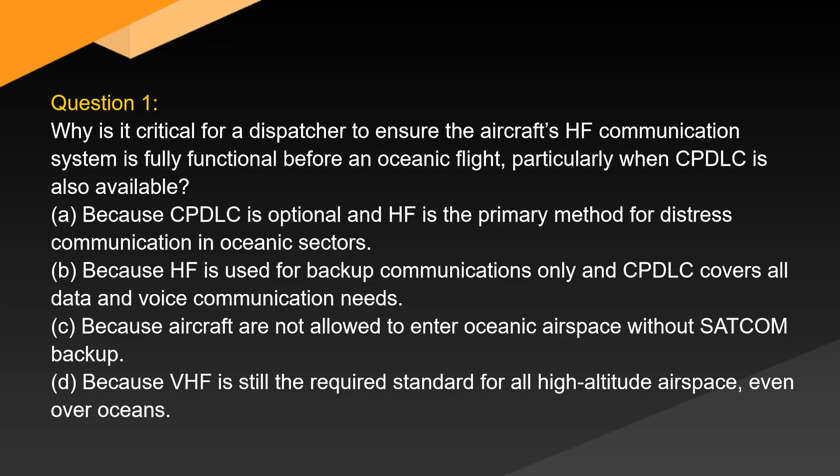A. Because CPDLC is optional and HF is the primary method for distress communication in oceanic sectors. B. Because HF is used for backup communications only and CPDLC covers all data and voice communication needs. C. Because aircraft are not allowed to enter oceanic airspace without SATCOM backup. D. Because VHF is still the required standard for all high-altitude airspace, even over oceans.

Correct answer: Because CPDLC is optional and HF is the primary method for distress communication in oceanic sectors.

Explanation. In oceanic airspace where there is no radar coverage and limited VHF range, high-frequency HF communication is the primary backup system for voice communication, particularly for emergencies. Although CPDLC, controller pilot data link communications, allows for digital messaging between pilots and controllers, it is not a substitute for HF when it comes to distress and urgency situations.

ICAO Annex 10 Volume II and FAA AC 90-117 clearly emphasize that aircraft operating beyond VHF coverage must have reliable long-range communication like HF. This ensures the aircraft can report positions, receive clearances, and handle emergencies. SATCOM can supplement but not universally replace HF, as many regions still rely on HF voice.

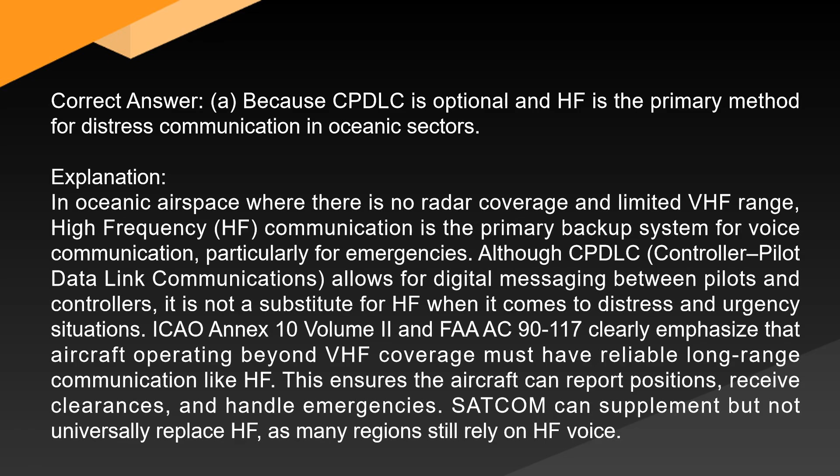Question 2. What is the primary consideration when deciding whether to divert an aircraft due to a pressurization failure during cruise? A. Remaining fuel and the distance to the nearest ETOPS alternate.

B. The aircraft's altitude and ability to descend to a safe breathable level within drift-down constraints. C. Cabin altitude and the passenger's oxygen supply limitations. D. The loss of communication ability due to system failure during the pressurization issue.

Correct answer: C. Cabin altitude and the passenger's oxygen supply limitations.

Explanation. A loss of pressurization leads to an immediate increase in cabin altitude. At altitudes above 10,000 feet, supplemental oxygen becomes necessary, and above 14,000 feet, regulations mandate it be provided.

FAA regulations under FAR Part 121.333 stipulate time of use limitations for oxygen masks, typically 12 to 22 minutes. This time is meant to allow the aircraft to descend to 10,000 feet where oxygen is no longer needed.

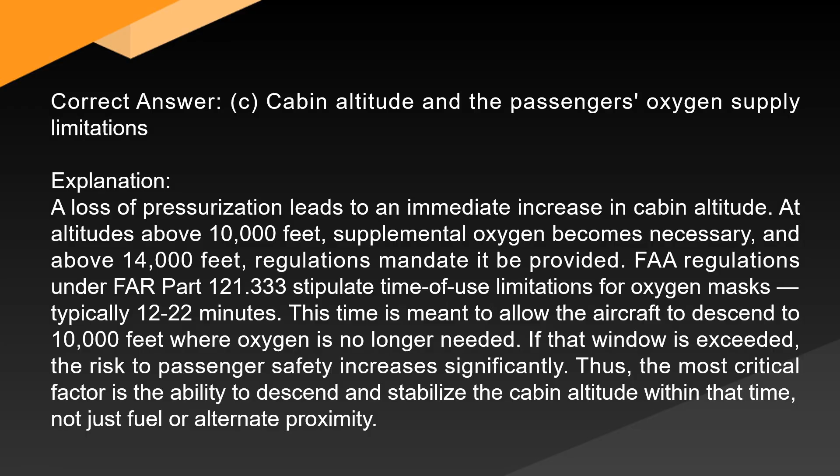If that window is exceeded, the risk to passenger safety increases significantly. Thus, the most critical factor is the ability to descend and stabilize the cabin altitude within that time, not just fuel or alternate proximity.

Question 3. Ms. Garcia is a licensed dispatcher overseeing Flight XR-120, a transatlantic route from New York to Madrid using a twin-engine ETOPS-certified aircraft. Two hours into flight, the aircraft experiences an engine oil pressure drop.

Although the engine is still operating within limits, the captain and Ms. Garcia agree to review diversion options. Weather conditions at the planned ETOPS alternate have deteriorated below landing minimums. Fuel reserves are sufficient for a diversion, but the only viable alternate now is 90 minutes further away.

What should Ms. Garcia do in this situation? A. Continue with the original ETOPS alternate, as fuel was already planned with reserves.

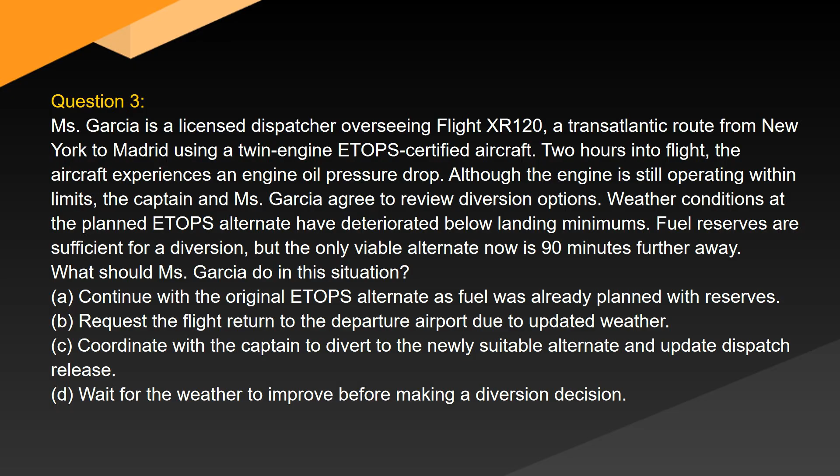B. Request the flight return to the departure airport due to updated weather. C. Coordinate with the captain to divert to the newly suitable alternate and update dispatch release. D. Wait for the weather to improve before making a diversion decision.

Correct answer: C. Coordinate with the captain to divert to the newly suitable alternate and update dispatch release.

Explanation. ETOPS, Extended Range Twin-Engine Operational Performance Standards, operations require that suitable alternate airports be available within the aircraft's certified diversion time, based on engine-out scenarios.

In this scenario, the original alternate is now below minimums, violating the requirement for an adequate alternate. ICAO Annex 6 Part I and FAA AC 120-42B require that the aircraft always remain within diversion range to a suitable alternate. Dispatch must coordinate with the PIC to identify the new suitable alternate and legally update the dispatch release.

Waiting is not compliant with regulations, and returning to the origin may not be efficient or necessary if another alternate is suitable and within ETOPS range.

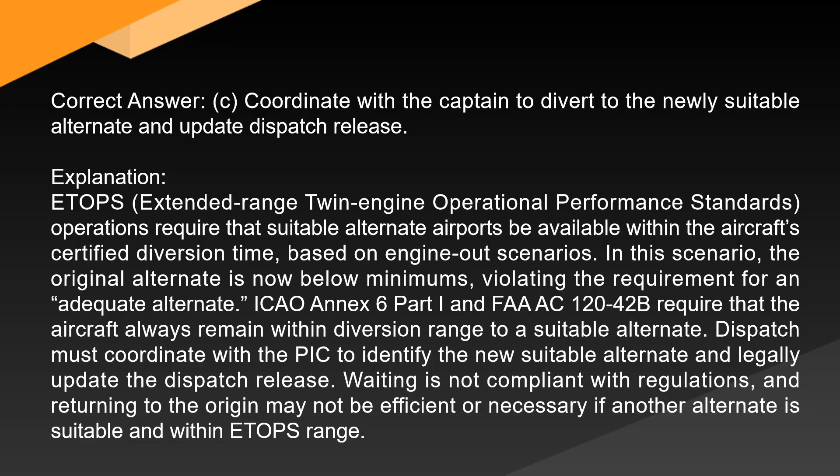Question 4. Which of the following best explains the importance of SELCAL in transoceanic operations? A. It replaces all need for manual HF radio monitoring during flight. B. It allows air traffic control to send voice messages directly to FMS.

C. It alerts the crew of an incoming HF communication, reducing the need for constant monitoring. D. It is used for data link messaging in place of CPDLC.

Correct answer: C. It alerts the crew of an incoming HF communication, reducing the need for constant monitoring.

Explanation. SELCAL, selective calling, is a valuable system that alerts pilots when a ground station wants to initiate communication over HF or VHF.

This reduces crew workload on long flights where HF monitoring is required but extremely fatiguing. SELCAL tones trigger a chime in the cockpit, allowing the crew to turn up the HF radio volume for that message only. ICAO Annex 10 recommends SELCAL usage in oceanic operations.

It doesn't transmit data or replace CPDLC. It's strictly an alerting system. CPDLC handles digital communications, while SELCAL applies to voice HF-VHF.

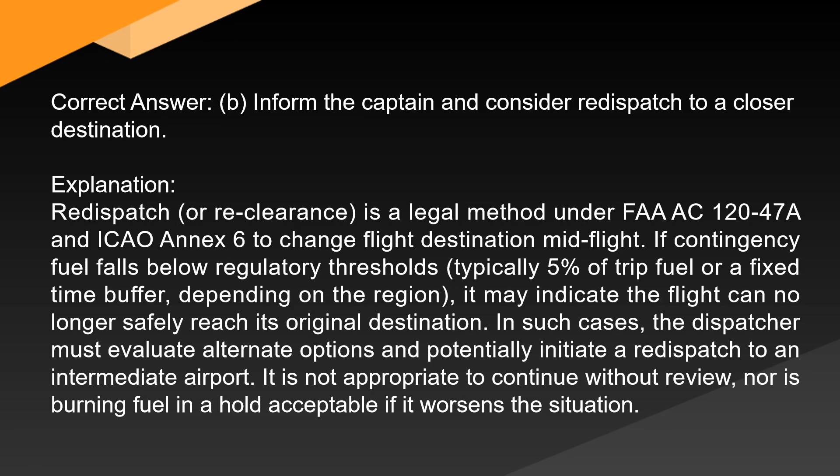In such cases, the dispatcher must evaluate alternate options and potentially initiate a redispatch to an intermediate airport. It is not appropriate to continue without review, nor is burning fuel in a hold acceptable if it worsens the situation. Question 7: Which of the following best represents the difference between CPDLC and ACARS in dispatch communications?

A. ACARS is used only for performance data, while CPDLC handles clearances. B. CPDLC is a proprietary airline communication, while ACARS is regulated by ICAO. C. CPDLC is used for air traffic control communication, ACARS is used for airline operational communication. D. There is no difference; both systems operate on the same protocol and function.

Correct answer: C. CPDLC is used for air traffic control communication, ACARS is used for airline operational communication. Explanation: while both CPDLC and ACARS use digital data links, their functions differ.

ACARS, Aircraft Communications Addressing and Reporting System, is primarily used for operational control, like sending out-of-limit reports, flight plan updates, and performance data between the aircraft and dispatcher.

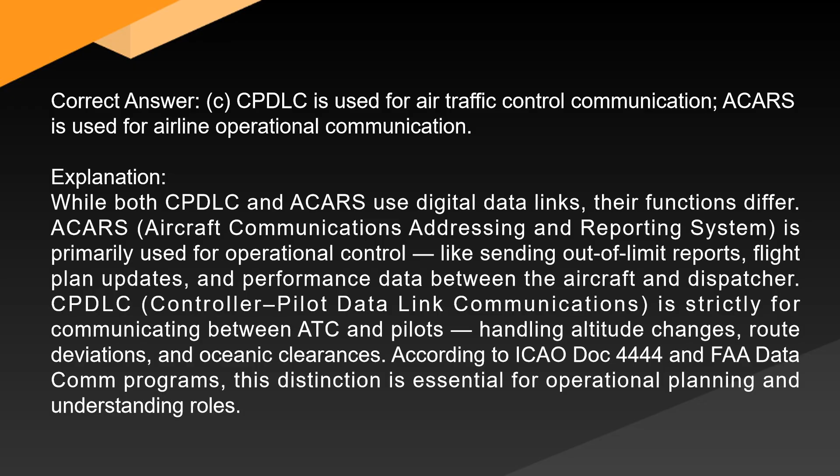CPDLC, Controller Pilot Data Link Communications, is strictly for communicating between ATC and pilots, handling altitude changes, route deviations, and oceanic clearances. According to ICAO Doc 4444 and FAA Data Comm programs, this distinction is essential for operational planning and understanding roles.

Question 8: During fuel dumping operations, what is the most important environmental and operational consideration a dispatcher must verify before advising the flight to proceed?

A. That the aircraft is at cruise altitude to ensure full burn-off of dumped fuel. B. That fuel dumping occurs over populated areas to allow for quicker ATC coordination. C. That fuel dumping occurs above a minimum altitude and away from congested areas or protected zones. D. That fuel dumping happens at low altitude to reduce atmospheric dispersion.

Correct answer: C. That fuel dumping occurs above a minimum altitude and away from congested areas or protected zones. Explanation: fuel dumping is regulated under FAA Order 7110.65 and ICAO environmental guidelines.

Dumping must be done at a safe altitude, usually above 6,000 ft AGL, and away from populated or environmentally sensitive areas to avoid harm to people and ecosystems.

ATC must be informed and involved, and specific dumping zones may be designated. Dispatchers must coordinate closely with ATC and the flight crew to ensure these procedures are followed, especially when time-critical descent or landing is needed.

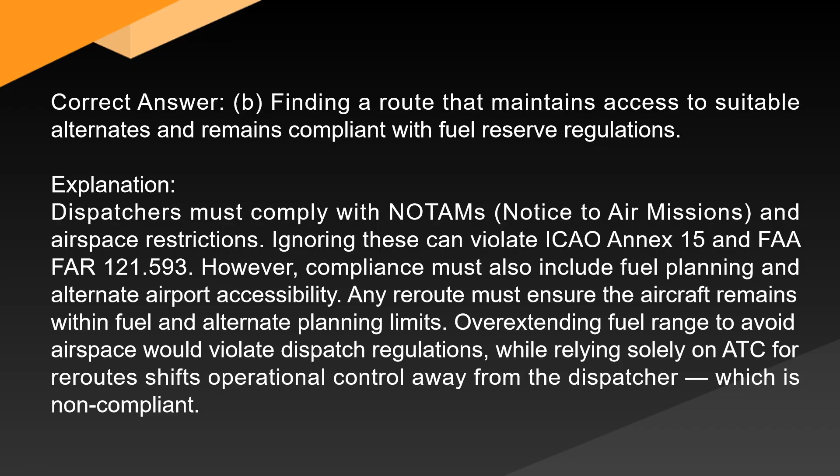Question 10. Which weather product provides real-time turbulence information derived from aircraft sensors and is most useful for en route operational updates? A. METAR. B. AIRMET. C. PIREP. D. SIGWX chart.

Correct answer, C. PIREP. Explanation: Pilot reports, PIREPs, are essential for dispatchers and pilots to assess actual flight conditions. PIREPs include turbulence, icing, and cloud tops, especially valuable when derived from automated sensors onboard aircraft, e.g., AMDAR or ACARS turbulence reports. They reflect current atmospheric conditions, unlike AIRMETs and SIGMETs, which are forecasts. METARs are surface observations. Dispatchers monitor PIREPs closely, especially when rerouting around turbulence zones. ICAO Annex 3 and FAA AC 00-45H emphasize PIREPs' operational importance.

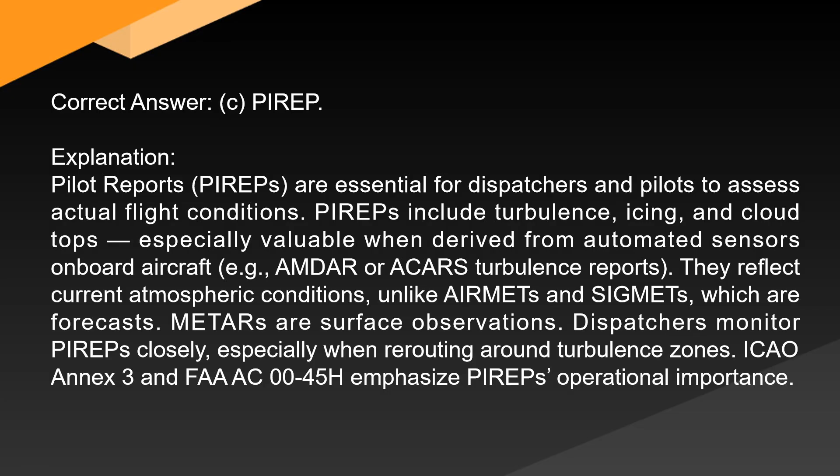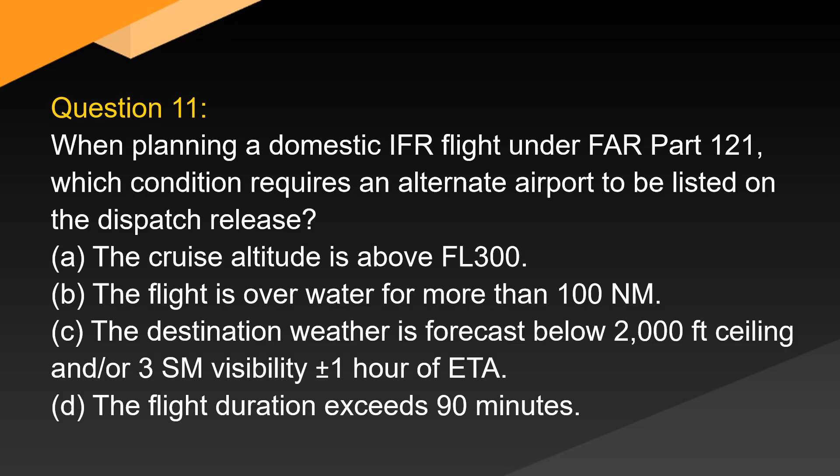Question 11. When planning a domestic IFR flight under FAR Part 121, which condition requires an alternate airport to be listed on the dispatch release? A. The cruise altitude is above FL 300. B. The flight is over water for more than 100 nm. C. The destination weather is forecast below 2000 ft ceiling and/or 3 sm visibility plus or minus 1 hour of ETA. D. The flight duration exceeds 90 minutes.

Correct answer: C. The destination weather is forecast below 2000 ft ceiling and/or 3 sm visibility plus or minus 1 hour of ETA. Explanation: This is the 1-2-3 rule from 14 CFR Section 121.619. An alternate is required if, from 1 hour before to 1 hour after the estimated time of arrival, the forecast weather is below 2,000 feet ceiling or 3 statute miles visibility. This ensures that if conditions deteriorate, a legal and suitable alternate exists. Flight duration, altitude, or distance over water do not independently mandate alternates under domestic IFR rules.

Question 12. A flight is planned from Dallas-Fort Worth, DFW, to Minneapolis, MSP. The TAF for MSP at ETA shows OVC 008, 2 SM BR, but a conditional tempo group shows improvement to BKN 015, 4 SM. Based on FAR Part 121 requirements, should the dispatcher plan for an alternate airport?

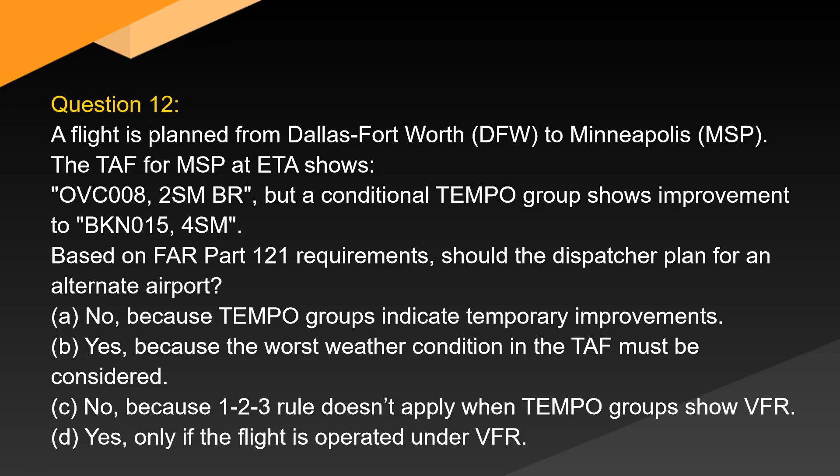A. No, because tempo groups indicate temporary improvements. B. Yes, because the worst weather condition in the TAF must be considered. C. No, because the 1-2-3 rule doesn't apply when tempo groups show VFR. D. Yes, only if the flight is operated under VFR.

Correct answer: B. Yes, because the worst weather condition in the TAF must be considered. Explanation: Per FAA AC 00-45H and FAR 121.619, a dispatcher must consider the worst prevailing condition, including tempo or prob groups, within plus or minus 1 hour of ETA when determining alternate needs, even though conditions may improve temporarily. If they are forecast to fall below the 1-2-3 rule during any part of the window, an alternate is required. The overcast at 800 ft and visibility of 2 sm clearly fail the test.

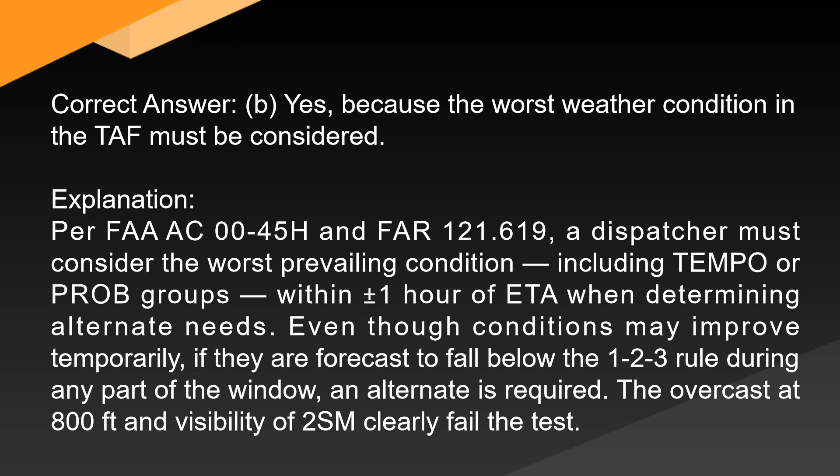Question 13. Which type of navigation aid is mandatory for dispatchers to verify availability for RNAV-dependent routing under Part 121? A. Only ILS equipment. B. GPS and ground-based VOR/DME infrastructure. C. TACAN availability along all airways. D. Non-directional beacons, NDBs only.

Correct answer: B. GPS and ground-based VOR/DME infrastructure. Explanation: When dispatching RNAV flights under Part 121, availability of GPS signals or fallback to ground-based infrastructure, VOR/DME, must be considered. FAA AC 90-100A outlines operational use of RNAV and requires dispatchers to check NOTAMs, RAIM predictions, or navigation system NOTAMs to ensure navigation reliability.

TACANs and NDBs are rarely part of modern RNAV en route navigation and are not primary considerations.

Question 14. When determining takeoff performance for a wet runway, which factor most significantly affects the V1 decision speed? A. The headwind component. B. The aircraft's weight only. C. The runway slope only. D. Accelerate stop distance and runway surface condition.

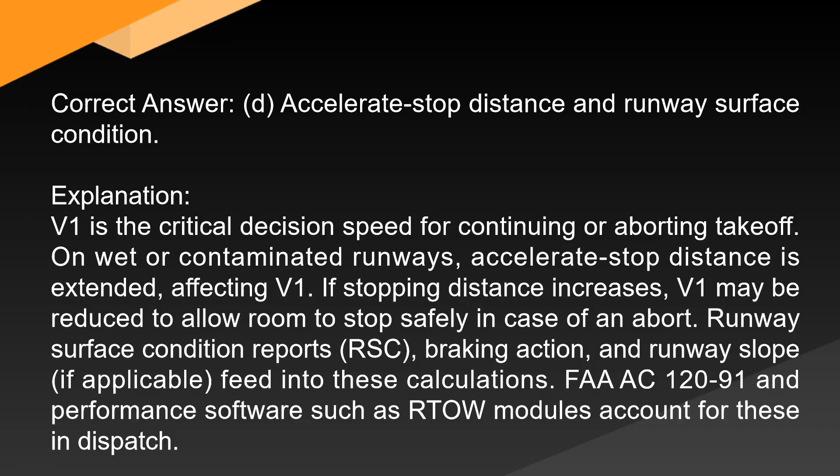Correct answer: D. Accelerate stop distance and runway surface condition. Explanation: V1 is the critical decision speed for continuing or aborting takeoff. On wet or contaminated runways, accelerate stop distance is extended, affecting V1. If stopping distance increases, V1 may be reduced to allow room to stop safely in case of an abort. Runway surface condition reports (RSC), braking action, and runway slope, if applicable, feed into these calculations. FAA AC 120-91, and performance software such as RTOW modules account for these in dispatch.

Question 15. An aircraft on an oceanic flight from New York to London loses contact with Gander radio on HF and attempts to use CPDLC, but no response is received for 10 minutes. The pilot contacts dispatch via ACARS. What should the dispatcher do first? A. Advise the flight to turn around to the previous domestic FIR. B. Contact Gander radio directly to relay position and request assistance. C. Instruct the pilot to descend to regain VHF range. D. Wait until the aircraft calls back after 20 minutes.

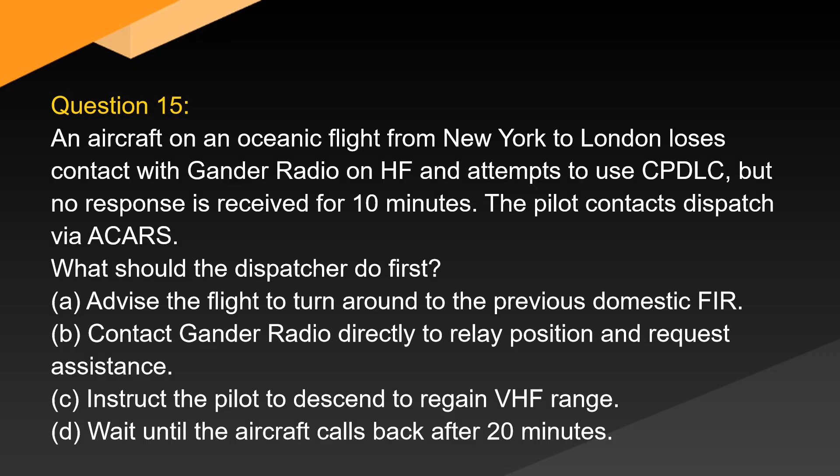Correct answer: B. Contact Gander radio directly to relay position and request assistance. Explanation: dispatchers must support aircraft communication gaps in oceanic airspace. If HF and CPDLC fail, per ICAO Doc 4444 and FAA NAT Doc 7, North Atlantic Ops Manual, dispatchers act as relays. The correct action is to contact the OCA, Gander in this case, directly and provide the aircraft's position and intentions. Turning back or descending could violate separation or worsen the issue. This is a core part of operational control responsibilities under FAR 121.

Question 16. Under FAR 121, what must be included in the minimum fuel supply for a domestic flight? A. Trip fuel only. B. Trip fuel plus fuel to alternate only. C. Trip fuel, alternate fuel if required, and 45 minutes at normal cruising consumption. D. Trip fuel plus 10% reserve of total block fuel. Correct answer: C. Trip fuel, alternate fuel if required, and 45 minutes at normal cruising consumption.

Explanation: per 14 CFR 121.639, dispatchers must ensure domestic flights carry fuel to reach the destination, fuel to fly to the most distant alternate if required, and fuel to fly for 45 minutes at normal cruise. International rules may vary, but under domestic ops, this is the minimum standard. The 10% rule is used in some international contexts, e.g., ICAO EASA rules, but not in FAA Part 121.

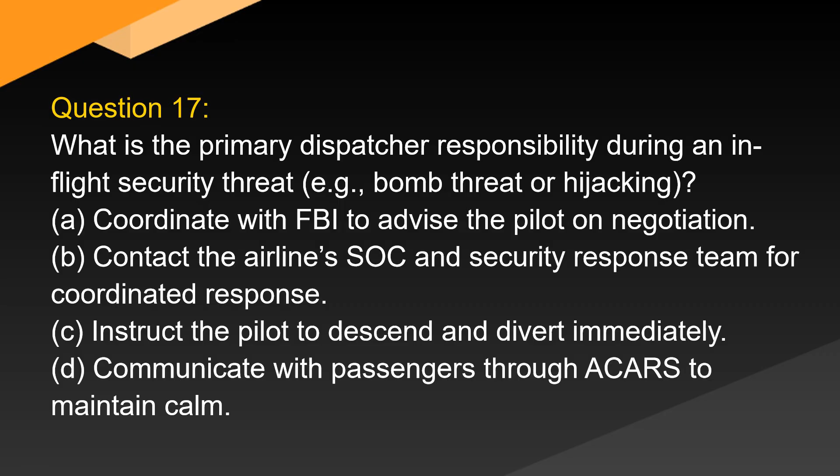Question 17. What is the primary dispatcher responsibility during an in-flight security threat, e.g., bomb threat or hijacking? A. Coordinate with FBI to advise the pilot on negotiation. B. Contact the airline SOC and security response team for coordinated response. C. Instruct the pilot to descend and divert immediately. D. Communicate with passengers through ACARS to maintain calm. Correct answer: B. Contact the airline SOC and security response team for coordinated response.

Explanation: Dispatchers must follow airline security protocols, which include immediate contact with the Security Operations Center (SOC) and emergency response plans (ERP). They should never advise specific security tactics to the flight crew. This is coordinated with FAA, TSA, and law enforcement. Per FAA security FARs, e.g., 49 CFR 1544, dispatchers act as the liaison, relaying information and ensuring compliance with pre-established procedures.

Question 18. Which condition would prevent the use of a preferred IFR route during flight planning under Part 121? A. The route crosses multiple ARTCC boundaries. B. An en route waypoint is temporarily closed via NOTAM. C. The flight occurs during nighttime hours. D. The route is longer than the direct route by 100 nm. Correct answer: B. An en route waypoint is temporarily closed via NOTAM.

Explanation: Preferred IFR routes, published in FAA notices and the chart supplement, are designed to ease ATC workload and provide efficiency. However, if any fix, waypoint, or navaid along the route is unavailable due to a NOTAM, the dispatcher must reroute the flight. Safety and legality take precedence. Crossing multiple ARTCCs or being longer in distance is not disqualifying, and time of day isn't a factor unless tied to a specific ATC flow restriction.

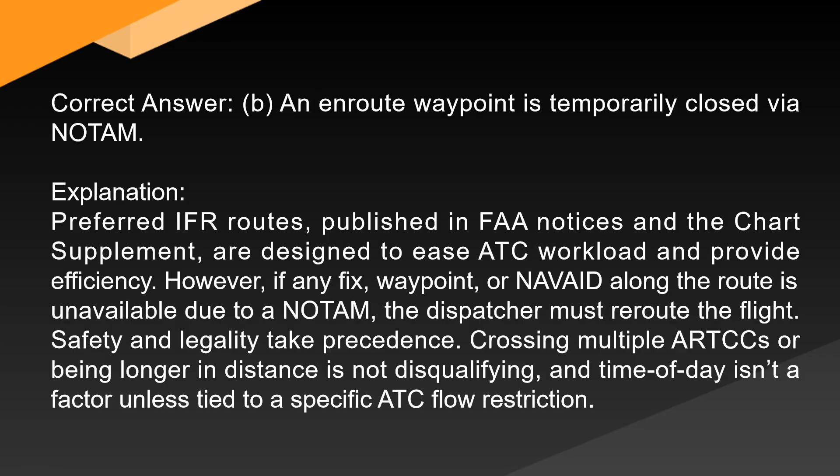Question 19. If an aircraft reports a dual generator failure while en route, what is the most appropriate dispatcher action? A. Advise the crew to continue as normal, since one APU can power essential systems. B. Suggest the crew declare minimum fuel and prioritize their arrival. C. Coordinate with ATC and recommend the nearest suitable diversion airport.

D. File an amendment to the dispatch release with a different route. Correct answer: C. Coordinate with ATC and recommend the nearest suitable diversion airport. Explanation: a dual generator failure significantly limits aircraft systems, especially if batteries are relied upon.

Dispatchers must treat this as an in-flight emergency per FAR 121.603 and 121.631, and help initiate diversion to the nearest suitable airport that meets landing requirements. Filing a revised route or ignoring the issue violates operational control responsibilities and safety regulations.

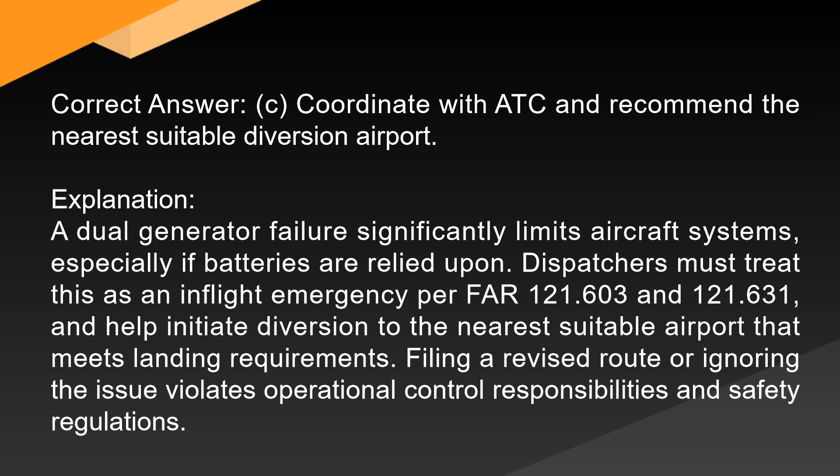Question 20. A flight is operating from Miami, MIA to Lima, Peru, LIM, under Part 121 international rules. The alternate airport listed is Quito, Ecuador, UIO. En route, a tropical storm diverts traffic in the Lima FIR. What should the dispatcher do immediately?

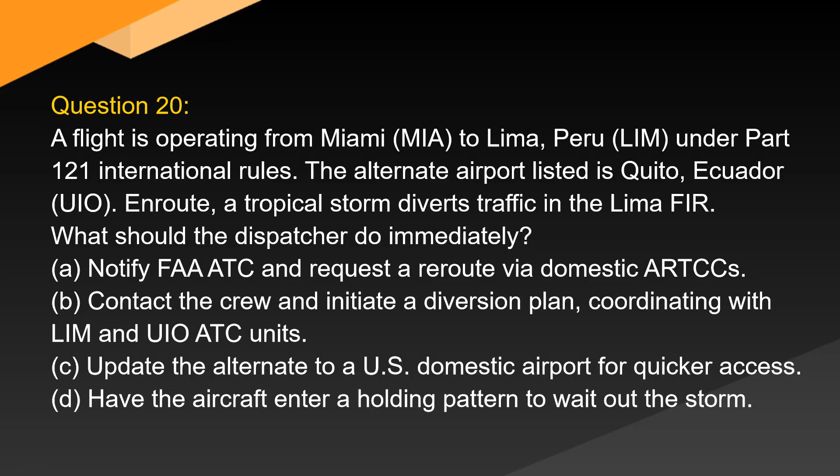A. Notify FAA ATC and request a reroute via domestic ARTCCs. B. Contact the crew and initiate a diversion plan, coordinating with LIM and UIO ATC units. C. Update the alternate to a U.S. domestic airport for quicker access. D. Have the aircraft enter a holding pattern to wait out the storm.

Correct answer: B. Contact the crew and initiate a diversion plan, coordinating with LIM and UIO ATC units. Explanation: under 14 CFR 121.631 and ICAO Annex 6, dispatchers are jointly responsible for safety of international operations.

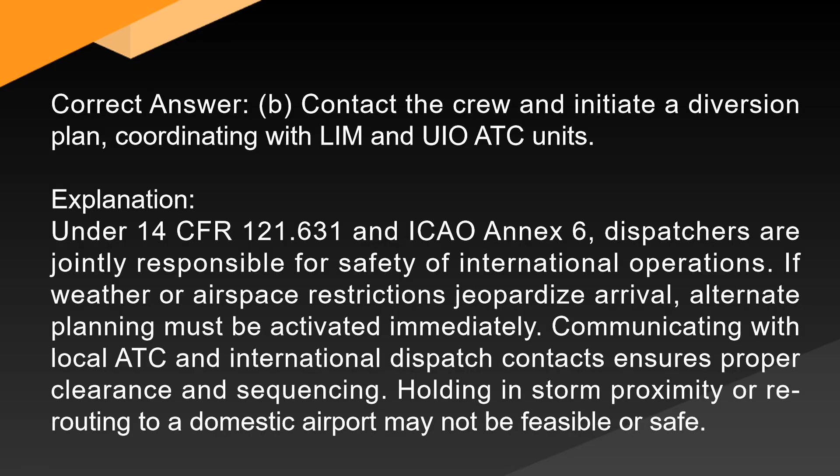If weather or airspace restrictions jeopardize arrival, alternate planning must be activated immediately. Communicating with local ATC and international dispatch contacts ensures proper clearance and sequencing. Holding in storm proximity or rerouting to a domestic airport may not be feasible or safe.

Question 21. What is the dispatcher's responsibility concerning aircraft weight and balance under FAR Part 121? A. Reviewing pilot's load sheet for boarding compliance. B. Ensuring maximum landing weight is within limits at the destination. C. Confirming that center of gravity is forward of the neutral point. D. Ensuring cargo is loaded by the airport station per company SOP.

Correct answer: B. Ensuring maximum landing weight is within limits at the destination. Explanation: while actual loading is the crew and ramp's responsibility, the dispatcher must ensure projected landing weight does not exceed the aircraft's maximum landing weight, MLW, factoring in fuel burn, payload, and possible alternate diversions.

FAR 121.135 and AC 120-27F emphasize dispatcher oversight of weight and balance planning, not direct loading. CG and exact load distribution are pilot and command responsibilities.

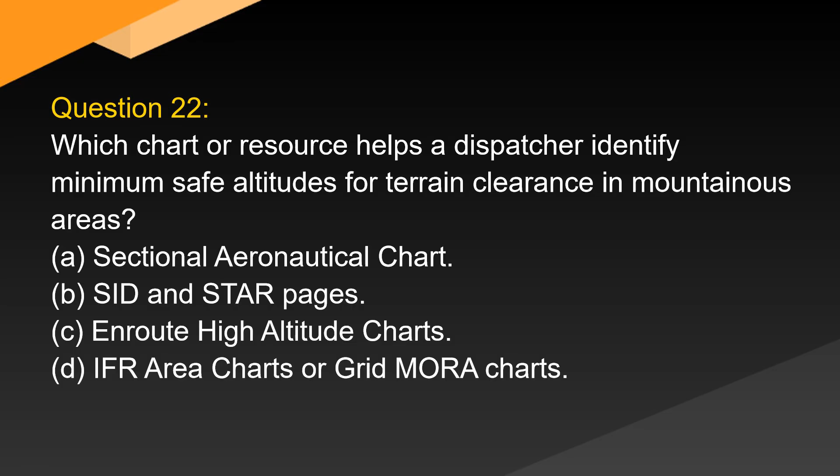Question 22. Which chart or resource helps a dispatcher identify minimum safe altitudes for terrain clearance in mountainous areas? A. Sectional aeronautical chart. B. SID and STAR pages. C. En route high altitude charts. D. IFR area charts or grid MORA charts.

Correct answer: D. IFR area charts or grid MORA charts. Explanation: grid minimum off-route altitudes, MORAs, or minimum sector altitudes, MSAs, on IFR area charts provide the lowest safe altitude that offers at least 1,000 ft, 2,000 ft in mountainous areas, clearance from obstacles.

Dispatchers use these for emergency descent, engine out, or non-precision approach planning. Sectionals and high charts are pilot tools, and SID/STARs only apply near terminals.

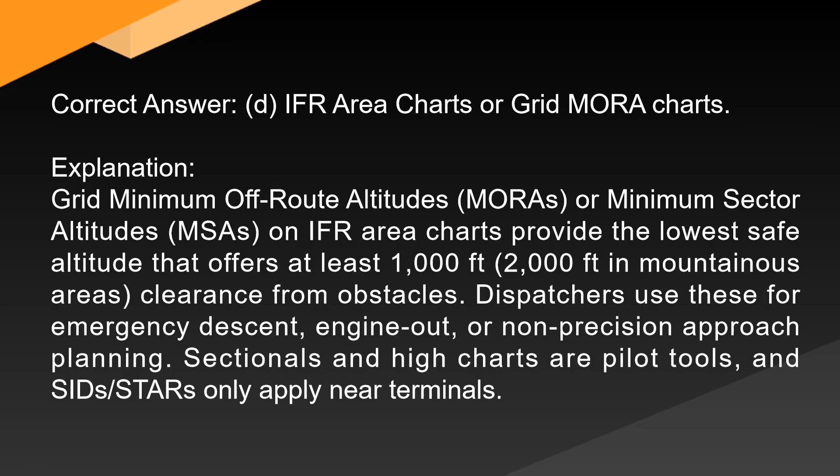Question 23. An A320 is scheduled to depart ATL to BOS with one air conditioning pack inoperative under the MEL. Ambient temperature is 95 degrees F. What is a key dispatcher consideration before releasing the flight?

A. Confirm that both cargo doors are operational. B. Ensure no thunderstorms are forecast along the route. C. Verify performance data reflects single-pack operation with temperature limits. D. Ensure the aircraft flies only below 10,000 feet.

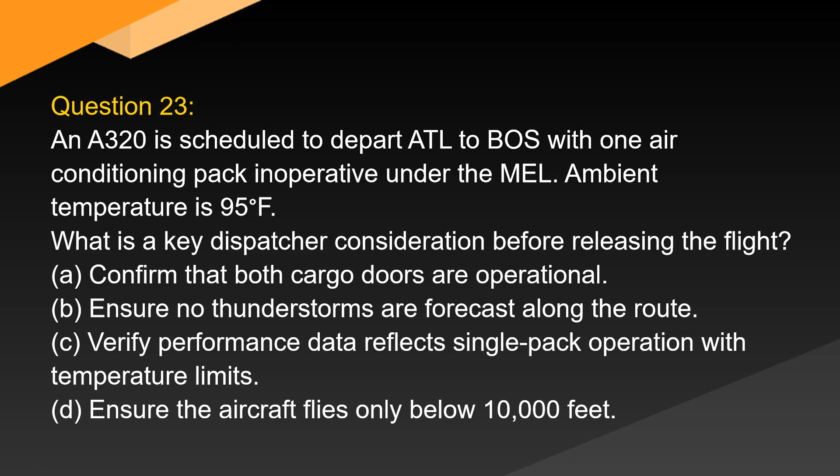Correct answer: C. Verify performance data reflects single-pack operation with temperature limits. Explanation: when dispatching with an MEL deferred system, such as an air conditioning pack, dispatchers must validate performance, especially on hot days, where cooling is reduced.

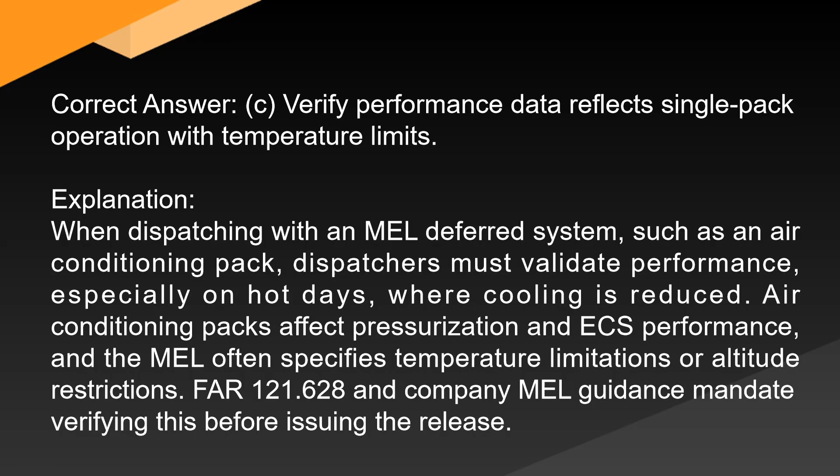Air conditioning packs affect pressurization and ECS performance, and the MEL often specifies temperature limitations or altitude restrictions. FAR 121.628 and company MEL guidance mandate verifying this before issuing the release.

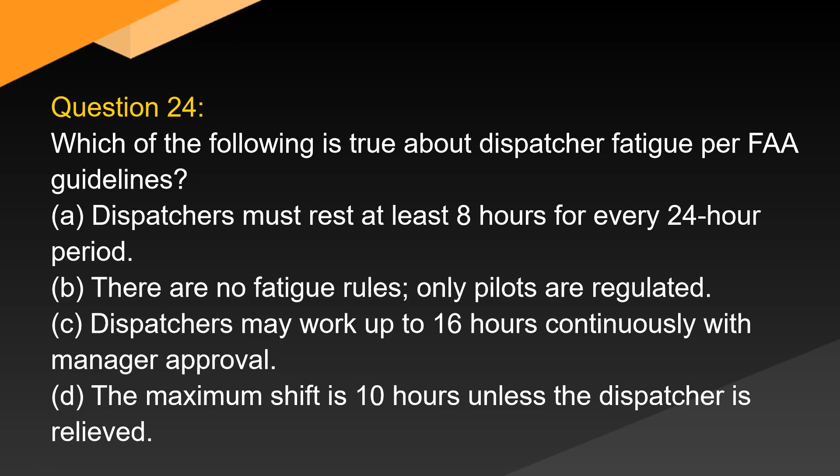Question 24. Which of the following is true about dispatcher fatigue per FAA guidelines? A. Dispatchers must rest at least 8 hours for every 24-hour period. B. There are no fatigue rules; only pilots are regulated. C. Dispatchers may work up to 16 hours continuously with manager approval. D. The maximum shift is 10 hours unless the dispatcher is relieved.

Correct answer: D. The maximum shift is 10 hours unless the dispatcher is relieved. Explanation: FAA regulation 14 CFR 121.465 states that aircraft dispatchers may not work more than 10 consecutive hours unless relieved by another qualified dispatcher. Rest requirements are similar to flight crew in terms of operational safety.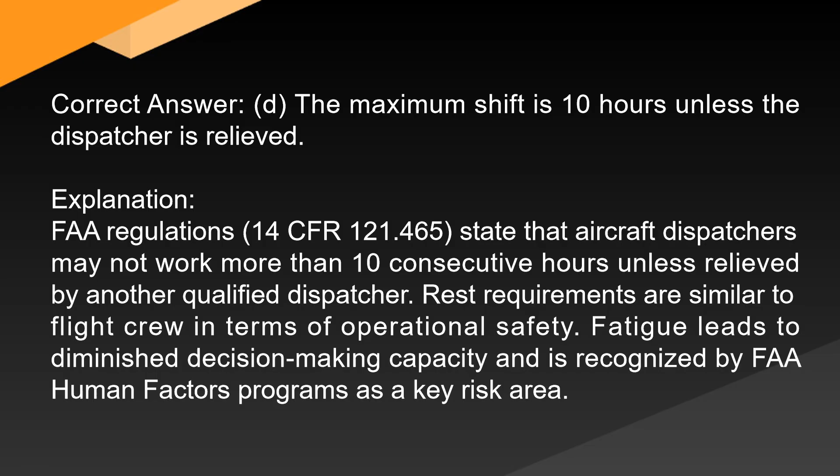Fatigue leads to diminished decision-making capacity and is recognized by FAA human factors programs as a key risk area. Question 25. A flight from DEN to SEA is airborne with an ETE of 2:15.

Halfway through, ATC advises an arrival delay of 45 minutes due to congestion. The dispatcher notes remaining fuel will be close to minimums. What should the dispatcher do?

A. Monitor until final fuel numbers arrive and decide later. B. Notify ATC that the aircraft will need fuel priority sequencing. C. Coordinate with the crew to initiate a diversion to a suitable airport with better arrival flow. D. Request direct routing to make up the delay.

Correct answer: C. Coordinate with the crew to initiate a diversion to a suitable airport with better arrival flow. Explanation: Part 121 mandates that dispatchers continuously monitor fuel to ensure minimums are met, even with delays. If fuel drops close to final reserve, e.g., 45 minutes of cruise fuel, the dispatcher must act early. Waiting too long violates operational control. Initiating a proactive diversion ensures safety, regulatory compliance, and efficient use of time and fuel.

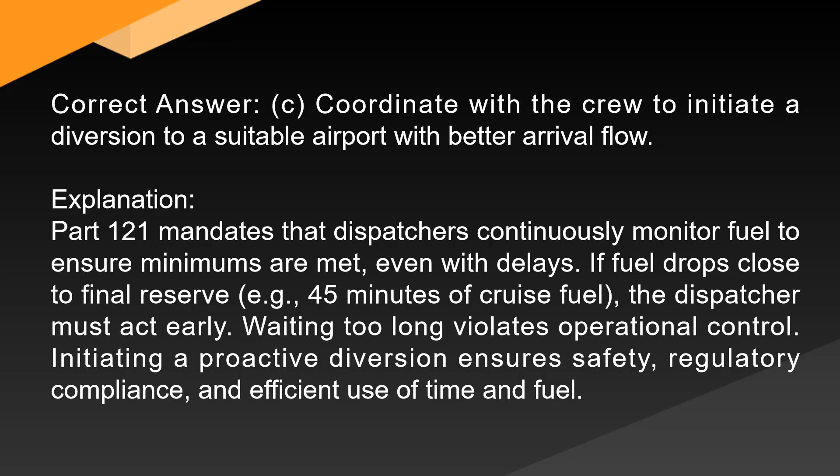Question 26. A NOTAM states: RWY 927 CLSD EXC EMERG DAILY. What does this indicate? A. Runway 927 is closed permanently, except for emergency use. B. The runway is closed only for emergency landings all day. C. The runway is closed each day from 300Z to 1100Z, except in emergencies. D. Only taxi operations are restricted during those hours.

Correct answer: C. The runway is closed each day from 300Z to 1100Z, except in emergencies. Explanation: NOTAMs use standard ICAO formatting. This message means runway 927 is closed daily from 300Z to 1100Z, and during that time only emergency aircraft may land. Dispatchers must avoid planning operations during that window. Permanent closures would use phrases like RWY CLSD UFN, until further notice.

Question 27. A flight from Los Angeles to Honolulu is planned as ETOPS 180. One of the en route alternates has deteriorated weather below landing minimums. How should the dispatcher proceed?

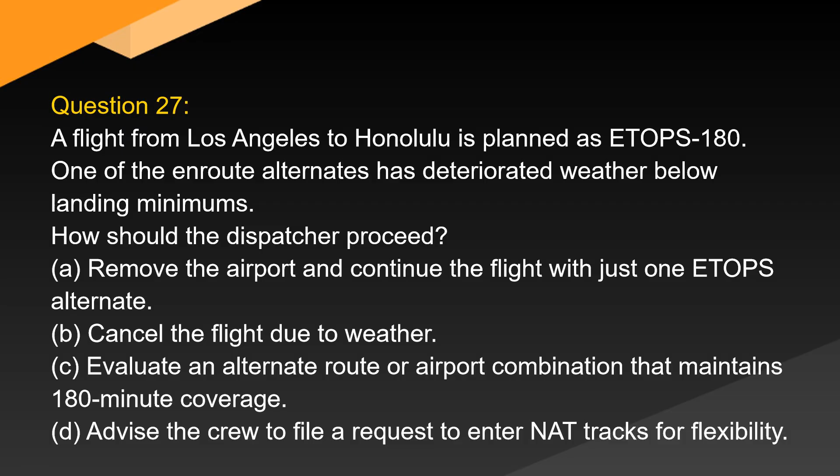A. Remove the airport and continue the flight with just one ETOPS alternate. B. Cancel the flight due to weather. C. Evaluate an alternate route or airport combination that maintains 180-minute coverage. D. Advise the crew to file a request to enter NAT tracks for flexibility.

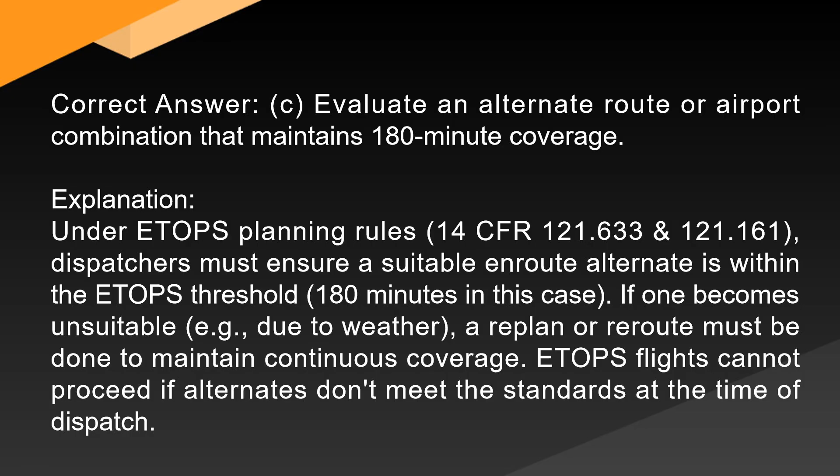Correct answer: C. Evaluate an alternate route or airport combination that maintains 180-minute coverage. Explanation: Under ETOPS planning rules, 14 CFR 121.633 and 121.161, dispatchers must ensure a suitable en route alternate is within the ETOPS threshold, 180 minutes in this case. If one becomes unsuitable, e.g., due to weather, a replan or reroute must be done to maintain continuous coverage. ETOPS flights cannot proceed if alternates don't meet the standards at the time of dispatch.

Question 28. Under which condition must a dispatcher issue an amended release for a Part 121 flight? A. Any flight plan with a cruise altitude above FL 290. B. If the aircraft swaps to a different tail number than originally planned. C. When the aircraft crosses into a new ARTCC boundary. D. When the pilot changes radio frequencies.

Correct answer: B. If the aircraft swaps to a different tail number than originally planned. Explanation: FAR 121.631 and FAA guidance require a new or amended dispatch release if any critical elements change, such as aircraft tail number, route, destination fuel, or performance parameters. Swapping aircraft changes weight, MELs, and equipment, requiring updated planning. Crossing ATC boundaries or frequency changes don't affect the legality of the dispatch release.

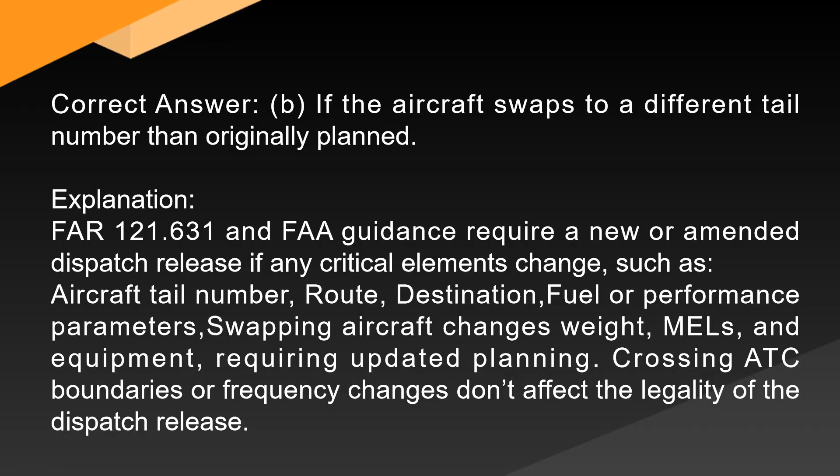Question 29. Which tool is typically used by dispatchers and flight crews to share real-time operational updates? A. FAA en route charts. B. VOR radial planning sheets. C. ACARS data link messaging. D. RAIM availability tables. Correct answer: C.

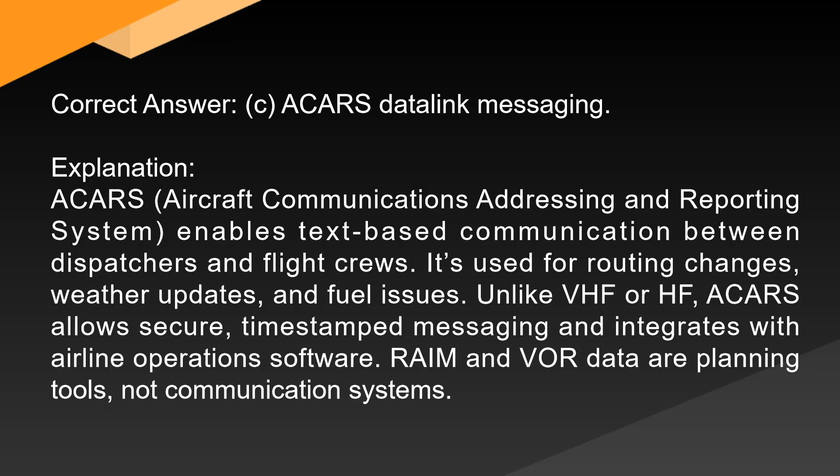ACARS data link messaging. Explanation: ACARS, Aircraft Communications Addressing and Reporting System, enables text-based communication between dispatchers and flight crews. It's used for routing changes, weather updates, and fuel issues. Unlike VHF or HF, ACARS allows secure, time-stamped messaging and integrates with airline operations software. RAIM and VOR data are planning tools, not communication systems.

Question 30. A flight is planned to depart Toronto during active snowfall. The dispatcher notes the use of Type IV de-icing fluid with a holdover time of 25-45 minutes. The flight is 5th in line for takeoff. What action should the dispatcher take?

A. Proceed as normal. Takeoff will occur within 45 minutes. B. Confirm holdover time compliance and coordinate with crew if it may expire. C. Wait until the aircraft calls for more fluid. D. Cancel the flight immediately.

Correct answer: B. Confirm holdover time compliance and coordinate with crew if it may expire. Explanation: Holdover time is the estimated protection window for anti-icing fluids. If the aircraft is delayed beyond the published limit, e.g., 45 minutes, a reapplication is required. Dispatchers must monitor conditions and coordinate with ground ops and the crew to prevent takeoff outside the safe window. FAR 121.629 and FAA's hot tables, holdover time guidelines, govern this process.